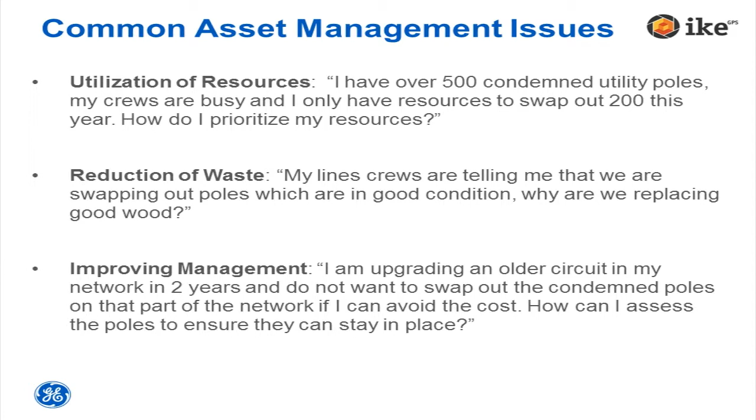So if we can help a utility determine the probability of failure for a pole and the expected time that they should swap that pole out, we can give them a best estimate for the most cost-appropriate replacement time for a pole.

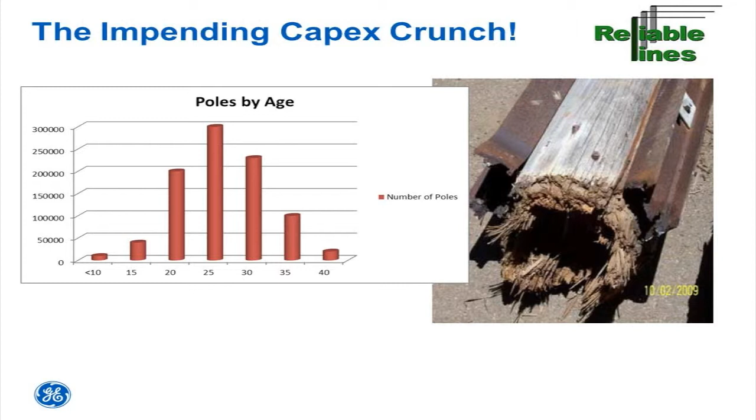Another big issue that's faced by a number of utilities at the moment is the aging infrastructure base. The fact is that once a pole goes into the ground, it does get older, and a large amount of the pole population has been installed in the 1940s, 50s, and 60s. Now, given that the average pole age tends to be around about 35 to 55 years, what we're approaching in the next decade is an impending capex crunch, where more and more utilities will have to swap out a larger and larger number of poles.

So as an attempt to help a utility manage the process, to identify which poles to swap out, to help manage their capital spend process, what we've done with Reliable Lines is created an integrated pole asset inspection process. Central to that process, we have a data mart. The data mart is a cloud-based data mart. It integrates to different GIS systems. It integrates to different third-party workflow systems. And it integrates to financial systems.

As part of that cloud-based data mart process, we of course track the asset, we track the inspection event or the maintenance event, and we also track the service request related to that particular asset. In the field, we deliver an application via a tablet which allows the field-based inspectors to use algorithms that have been developed to estimate the percentage remaining strength of the pole while they're in the field.

As part of that inspection process, we allow the use of NDT, non-destructive technologies, and we are somewhat agnostic about which NDT we use. We of course have some that we've calibrated extensively, but we are quite open to using multiple NDT solutions for this integrated solution set. We also can pull in manual measures, and as part of that process, we can also pull in and mass update GE MapSight IKE files.

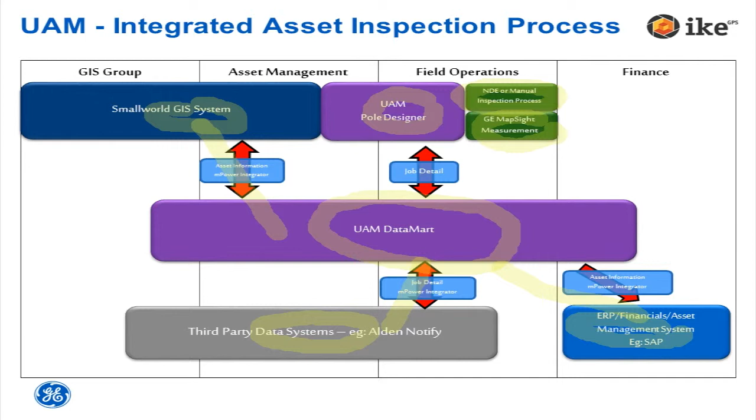What we'll do now is go down and look at some of the individual tools and how they're used in that process. And of course, the reason that we're here today is we advocate the GE MapSight product. The reason for that is it's the best product for measuring utility poles on the market. For those folks who do not know about GE MapSight, it's a GPS, a laser rangefinder, a computer, a camera, a compass wrapped into one. So because it's aware of its situation and because it has a laser rangefinder, it can measure any other point that can be targeted with the laser.

Now we find that particularly useful in several areas. The first area, of course, is measuring the height of the pole. What we have as part of our process is the requirement to get an accurate measurement from ground line to tip of pole. We also need to measure the circumference at ground line and at 6 feet. So those two measures are what we use in what we call a base inspection process.

The operator enters in details about the pole into our tablet, and of course there are a number of standard fields within that tablet that get entered by the operator. There is, of course, a workflow, work packet numbers. There are details about the pole, the species, the class, as I mentioned, the height from ground line to top, the circumference at ground line and at 6 feet, whether it's got deep cracks or checks, what sort of treatment, and of course we take pictures of the pole when we're on site.

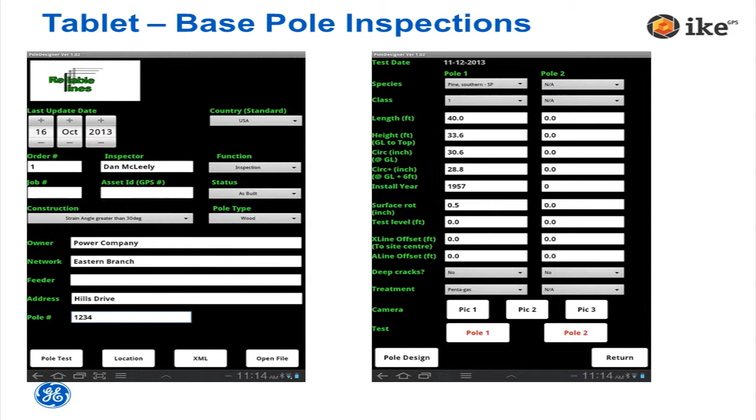Once we've done that, we then extrapolate from the algorithms what's called a threshold value. A threshold value for us is the time of flight for a test, a sound test through the pole, which gives us an understanding of whether that pole or the inside of the pole is deprecated or not. So by having a threshold value and by using one of the non-destructive testing technologies against the pole, we can quickly tell if the pole has some sort of interior decay.

We tend to use 3 non-destructive technologies with our client base, but as I mentioned, with our integrated solution, we are somewhat open to using other NDT and manual processes. I'll talk a little bit about the SB800 first.

The SB800 is what's called an ultrasonic tomography device. What it allows an operator to do is actually record the time of flight of sound through the pole. Now, if the sound takes longer to go through the pole, it means the sound is going around some sort of decay or deprecation, and therefore it's an indicator that there is something wrong within the inside of the pole.

We also have a pole radar unit. A pole radar unit is essentially putting a radar beam similar to a torch or a flashlight beam through a pole, and the reflection that comes back from decay is recorded in the algorithms we use to identify that decay.

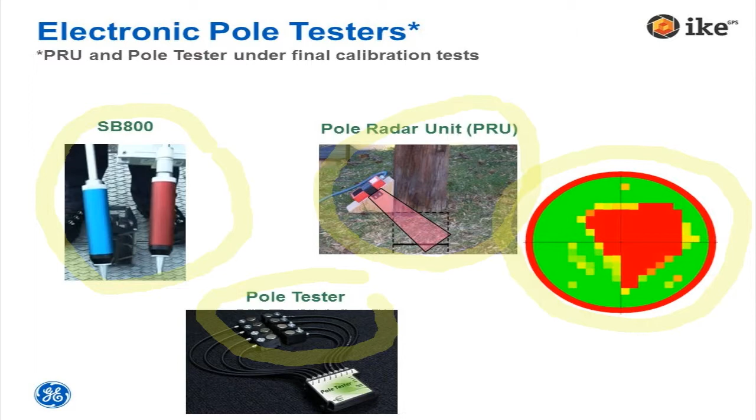So most often our clients find that interior decay happens at or just below ground level, and so the SB800, when it's used at a ground level point, will actually indicate and show any deprecation of cells within that pole very quickly. Once the operator has tested and run a scan on the pole, the scan automatically also calculates out a percentage of remaining strength, and we then synchronize that data up into a cloud-based database.

So from an asset management point of view, we can allow a utility to say, of the 3 or 5 or 30,000 poles that we've tested, we can stack rank them by percentage remaining strength, and we can focus our resources on swapping out the poles with the lowest percentage remaining strength. So that is one quite simple way that we help utilities manage and identify where to use their valuable resources and where to focus those resources to increase the reliability of their network overall.

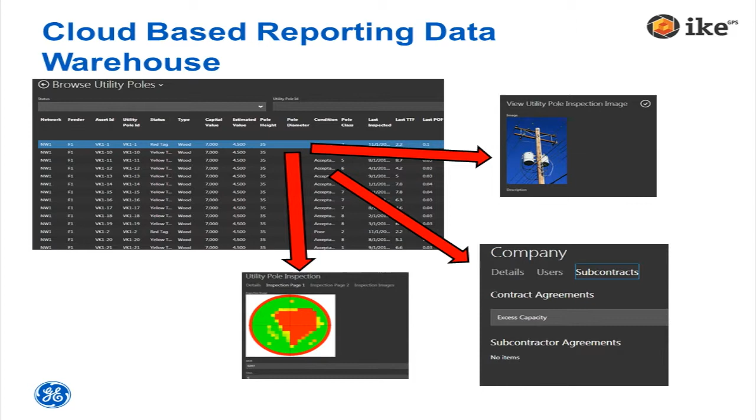We then take the idea about whether a pole can remain on site or not to another level. Of course, percentage remaining strength is a very good indicator, and most utilities use that as their dominant requirement for swapping out a pole. But we then use the GE MapSight tool to take a range of other measures regarding the pole in order for us to do what's called a reliability assessment.

A reliability assessment is the ability to look at the pole structure, to understand the environmental considerations around the pole, and then to develop a probability of failure analysis for that particular pole based on the unique characteristics of the pole.

So a very common scenario, for instance, and most folks who work with networks will have seen poles which may have anything down to 8 or 9% original strength, and yet the pole will still be standing because the conductors are actually holding it up. And so it's quite common for those poles, especially if they've been reinforced appropriately, to be able to remain in service for a longer period of time.

So one of the key measures, if we do a reliability, of course, therefore, is what sort of stress or support are the conductors, the strains, the cross arms, the attachments, any taps on the pole. What sort of support are they providing the structure, given that the actual percentage original strength is deprecated?

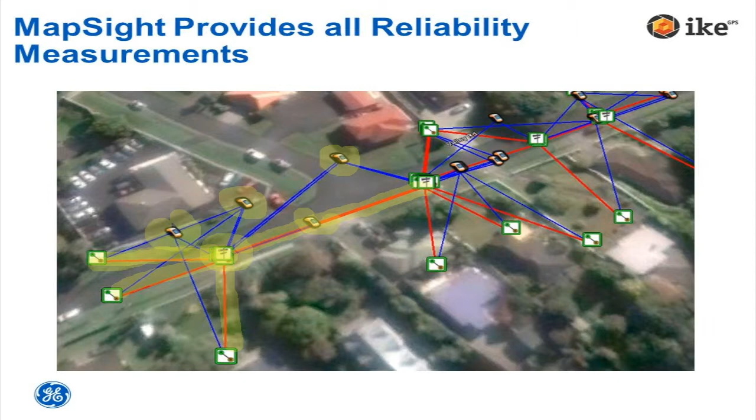So it becomes very obvious when an organization decides to look at using reliability that it is essential to use a measurement tool that can not just measure and track the GPS locations of different points, but also provides a reliable and auditable system behind it. So the outputs from the GE MapSight measurements for reliability, of course, include photo verification of those measurements, so that when the engineers are reviewing the reliability assessment to determine whether, yes, they will accept that report and leave the pole in service for a number of years, they actually have an auditable set of information to review as they're making that decision.

So the next slide shows, on the left-hand side, another tablet screenshot, which shows some of the elements that we look at as part of that reliability assessment. What we'll do is we'll actually take wind profiles for a particular area over a return period of up to 50 years. We'll look at the soil type. We'll look at the type of climate, the ice thickness on the pole, and then we'll develop a bell curve of the expected force that will be applied against the pole, and that bell curve is highlighted in blue.

After we've measured the pole with the GE MapSight system, and after we've entered in details about the conductor angles, the span lengths, the angles of any supports, any trusses that are on the pole, then the algorithms within the tablet will calculate out an expected value or the ability of that pole or structure to withstand force. And so that's what the green bell curve is. The ability of that structure to withstand the force that's applied against it, based on a return period of 50-year extreme wind gusts. By definition, therefore, the intersection of those two bell curves is where the probability of failure for that structure is. You have the expected force, you have the expected ability of the structure to withstand the force, and therefore you can calculate out a probability of failure percentage.

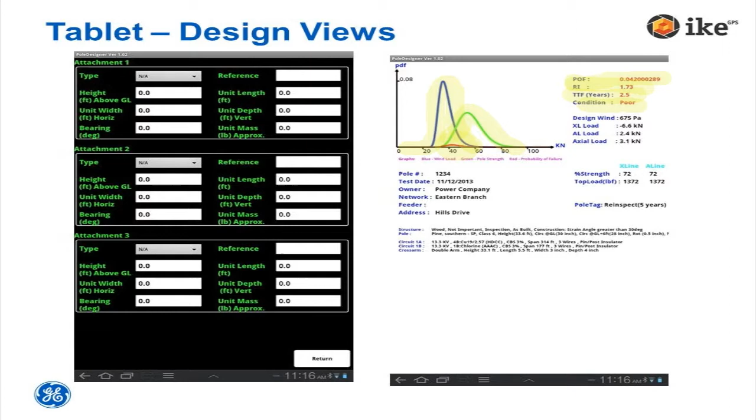We then turn that into what we call a reliability index. So a reliability index for this particular pole is just under 2, 1 being hazardous or very poor, and 6 being good. So this pole has quite a high probability of failure, and therefore it's assessed as poor. We can also extrapolate out what's called a TTF, a time to fail in years, 2.5 years. So our assessment of this pole after we've done a reliability analysis on it is it's pretty marginal, and it's probably something that should be prioritized for replacement within the next year and a half in order to give the utility a little bit of a buffer on the reliability assessment within the system.

So what is the payback from this type of approach to managing a pole population? Well, the first one is it's a non-destructive process. So it complements a standard inspection process quite well because it provides the ability for a utility to reassess the red tag poles that may have come out of their regular inspection program. But of course, when we're doing that retest, we don't necessarily want to put more holes in the pole itself.

The second payback is it's very consistent. Because we're using accurate measurement tools, reliability algorithms, and a non-destructive test device that has an electronic read, we can provide a very consistent analysis of those poles and a very granular analysis as well. So if a utility has 500 red tag poles in the field, they can retest them and run reliability on those 500 poles. And if they only have resources to swap out 200 for that particular season or year, then they can of course apply their resources against the most hazardous poles first.

It also provides a management platform. Because we are now tracking the pole inspection at a granular level with a large number of outputs and parameters regarding that pole, we can start tracking and recording a history for different poles that we may decide to leave in the network.

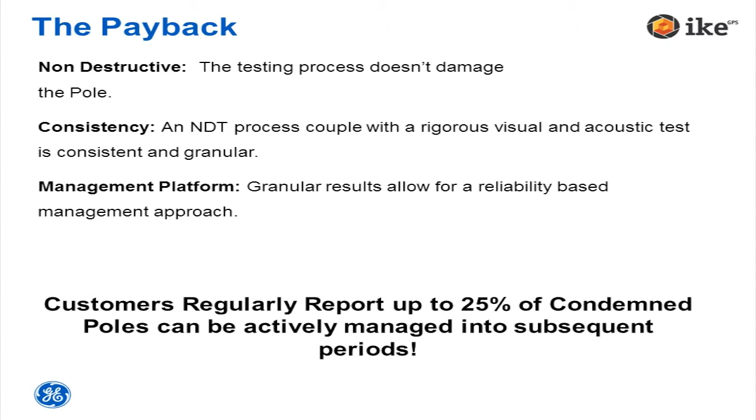We'll just go back briefly to the SB800, the ultrasonic tomography test, just to provide a little bit more of a layer of information about how that test looks with regard to live poles. So for instance, we have a transmitter probe and we have a receiver probe.

And the way that ultrasonic tomography is used to test a utility pole is that we will put nails in 8 points of the pole at the level that we want to test the pole at. So if we're testing for ground line internal decay, of course it will be ground line. We have a number of clients that use this technique to measure and estimate the extent of pocket decay in transmission poles. So of course pocket decay can happen anywhere in the pole.

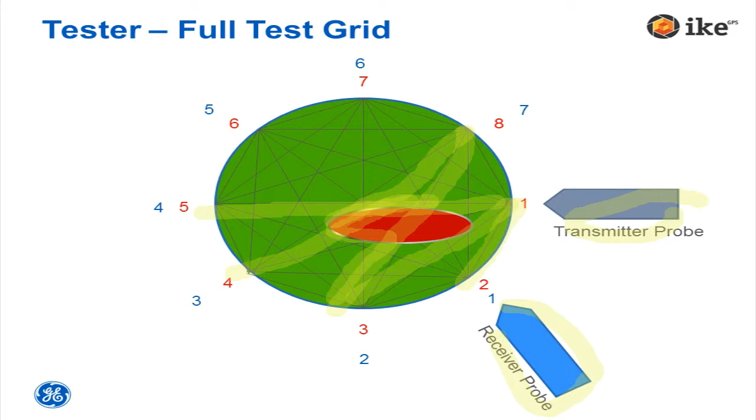The basic process, however, is by having a transmitter probe and a receiver probe and timing the flight between those probes. When the sound intersects with some sort of internal decay, the actual sound travels around that decay, and therefore it takes longer in microseconds to get through to the receiver probe.

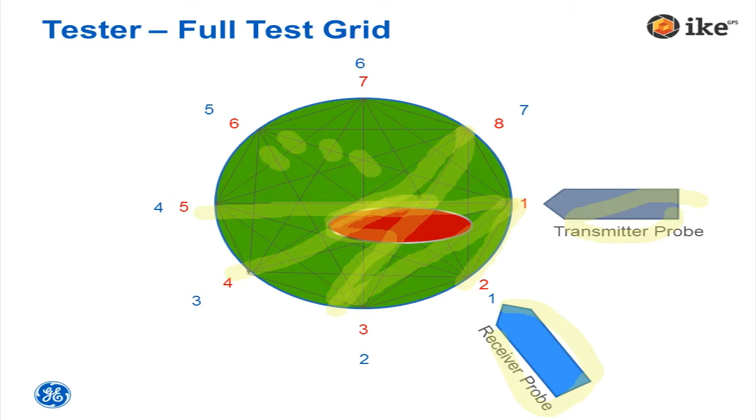So by taking a number of measures, we're actually taking a number of vector points throughout the pole, and from that we are creating an image of what the decay area within that pole looks like. So the decay in the pole is measured in red, good wood is green, and you'll notice that there is actually some red outline, and this indicates that the inspector has identified some shell rot. And on this particular pole it looks like he's probably entered in 1/4 inch of shell rot.

So the shell rot assessment using this process is done using a mold probe approach or as part of the partial excavate. The report from that full scan then gives that percentage of original strength for that particular pole.

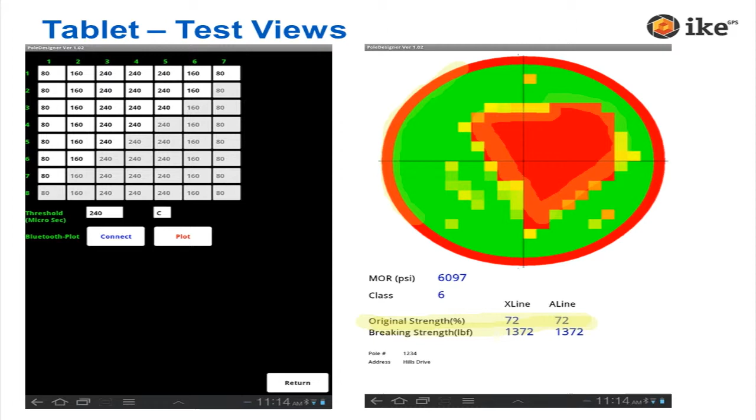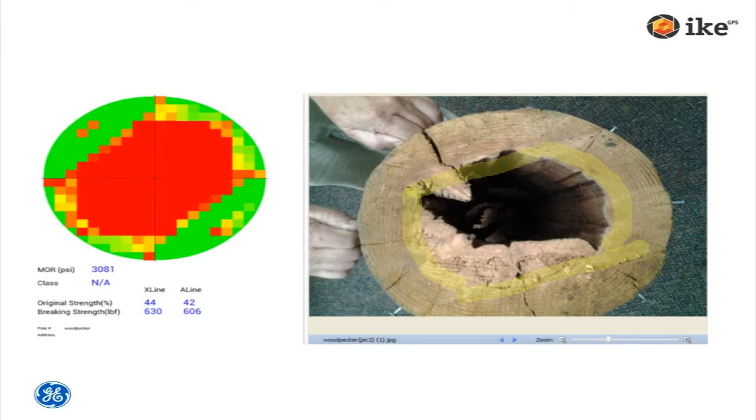We have here a couple of examples of poles that have been tested in the field and the resultant tomography view on the side, and you'll notice that this pole on the right hand side, there is degradation in this area here, and in fact as part of that degraded part of the wood, a woodpecker has actually drilled its way into the side of the pole and created a woodpecker nest.

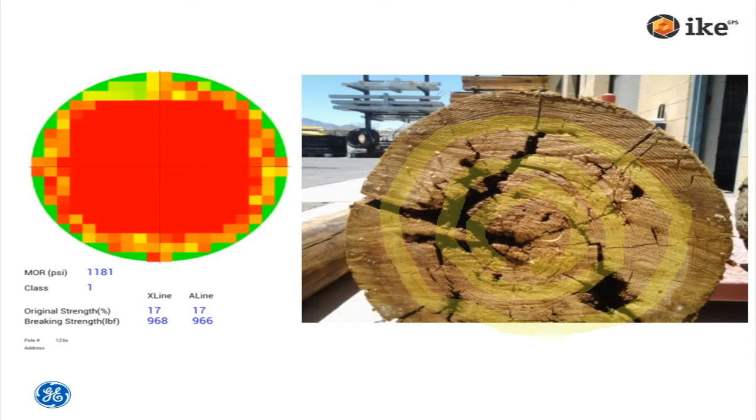This image here is a large transmission pole, and the internal of the pole has been completely rotted away. So when we look at this internal here, it was essentially a mud type mix. The outside of the pole was still very healthy, and it actually passed its acoustic or hammer test. But using ultrasonic tomography, we could identify that the entire internal of it was decayed on the left hand side.

So what we've covered today, we've talked a little bit about common pole management issues. We've talked about using a non-destructive technology to perhaps run a retest or reassessment of some of those red tag poles, maybe to use as a complementary test to the standard test that's being run by a utility. We've looked at some of the key tools used during the process. Of course, the GE MapSight tool is critical for us in order to create an accurate and granular assessment of the quality of the pole using the probability of failure approach.

We've talked about the assessment of some of the results and how we can use a simplistic stack ranking of percentage original strength to allow a utility to focus their resources on the most hazardous poles first. And of course we've talked about that probability of failure analysis process.

Wayne, thank you very much. Appreciate that presentation. I've got a couple of questions for you.

First, just a simple technical question. What type of device does your application in the field run on?

A Samsung tablet, an Android device. So basically any Android device? Typically we recommend a 7-inch or the 10-inch, just from the point of view of the form factor. We recommend a 10-inch. Okay, and how do you take information, data from the MapSight device and get it into